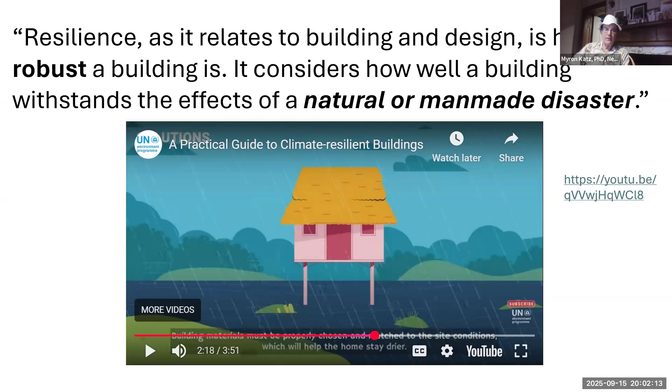Since they're in the wholesale business, they're interested in getting electricity to people. So from the point of view of energy, they say reliability is the ability to meet the electricity needs of end-use customers, even when unexpected equipment failures or other conditions reduce the available power supply. I find this particular definition confusing because it seems to mix the 2 meanings of reliability and resilience together. Until you get to the comma, you're talking about reliability, and after the comma, you're talking about resilience. So as a way of explaining reliability and resilience, they confuse you. But apparently that's not uncommon for utilities.

And so we'll see how you get resilience despite the fact that the utility is not helping you. But part of the problem is that the way they do things, they consider utility reliability from the point of view of the supplier and not from the point of view of the consumer.

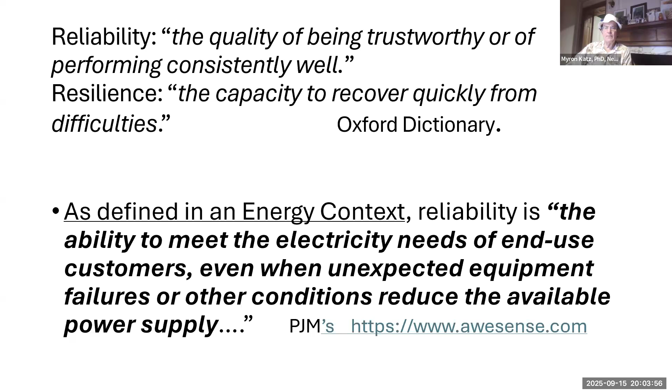And we're going to be showing how that changes how to solve the problem in a bad way. Okay, so I get this out of here. I don't know, there's something from Zoom getting in the way of doing the slideshow, so I'll forget about that.

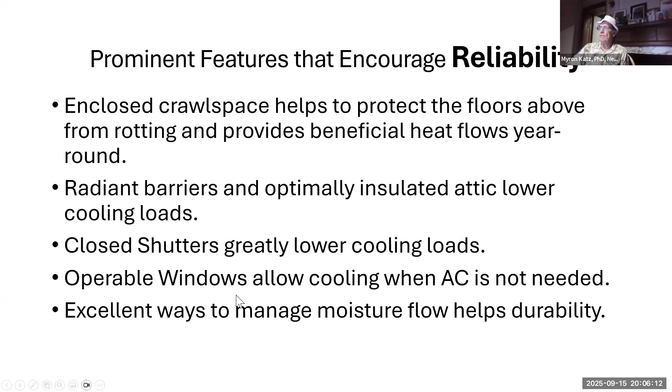Radiant barriers slow down the heat gain in the attic. Closed shutters lower cooling bills. Operable windows allow cooling when AC is not needed, and they provide excellent ways to manage moisture flows, helping durability.

Two more reliability features: multiple ventilation methods also improve indoor air quality, and efficient lighting, cooling, and water heating lower carbon footprint. But the last one on the list is both reliability and resilience, namely Wi-Fi controllable water heating and cooling systems provide load flexibility.

And if you don't know what that is, raise your hand, ask me up, disturb me, and I'll explain it. Savings or income when time-dependent electricity pricing is implemented, and we can use that money to buy batteries that we may not have purchased at first.

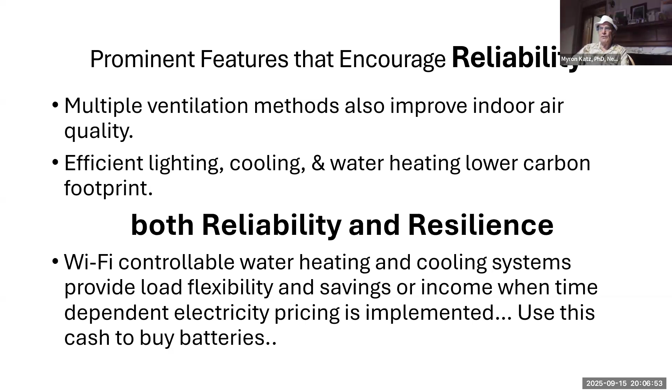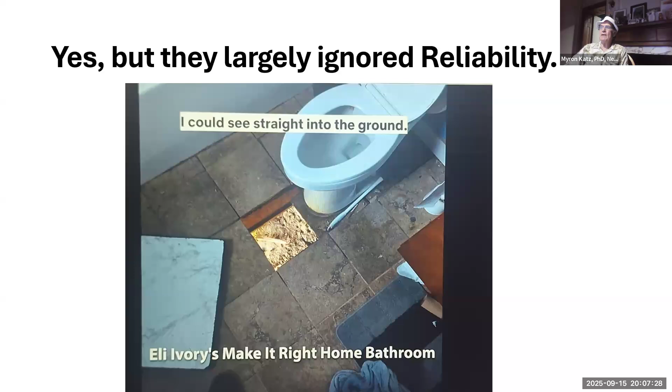He says, you mean your leg went through the floor? Yes, my leg went through the floor. And there it is, the hole in the floor right in front of his toilet that rotted out, the wood rotted out. So yes, they built a resilient home, but they skipped lots of things about reliability.

So you might think you get reliability if you do resilient, but not necessarily. The Make It Right project leaders mistakenly believed that resilient measures would ensure reliability, leading to a critical design flaw in home construction. What did they forget to do?

They didn't realize that flood protection does not stop persistent wood rot from constant wetting, especially with prolonged indoor cooling below the outdoor dew point. I think most of the people in this group know what those words mean, but if you need to interrupt me, please interrupt me.

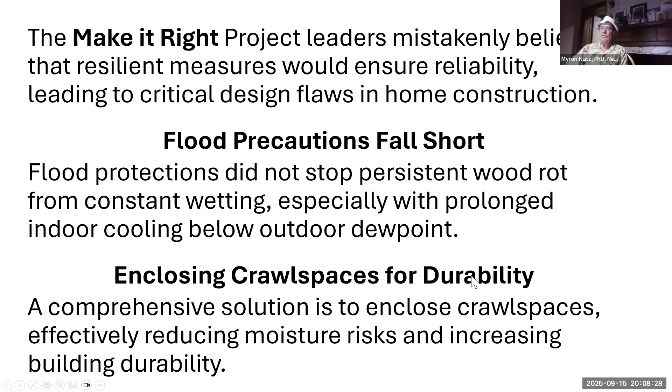So if you enclose the crawl space, you improve your durability because there is a comprehensive way to protect the floors from that moisture flow. And while you're doing it, you'll have beneficial heat flows. If you don't know why that is, I encourage you to ask me.

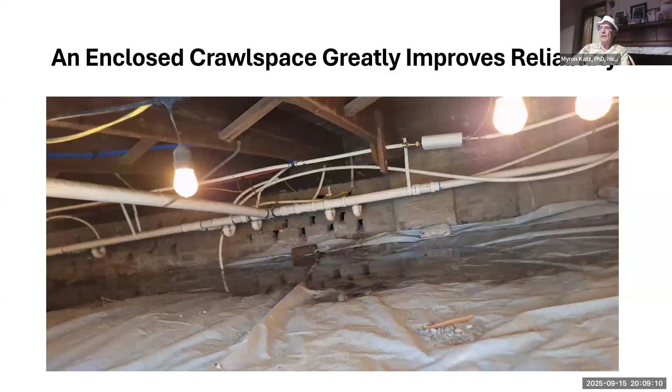So I opened the crawl space literally two weeks ago. It was the first time I did it in over half a year. Much to my dismay, there was standing water of around 10 to 15 square feet all over the plastic cover over the floor.

And I said, oh my gosh, maybe this crawl space is failing. But when I checked out the wood, it was all dry. And when I checked the temperature of the air and the humidity, I found out it was dry. The crawl space had a dew point of 60 degrees Fahrenheit.

I have this little app on my phone which allows me to do a test like this no matter where I am. I ran the app for about three or four minutes and saw the reading meandering, then start to settle down around the current temperature and relative humidity. If you do the calculation, those two numbers give you all you need to know about dew point.

Maybe you don't know what dew point means. A simple example: take a bottle of water, pour all the water out, close the top, put it in the freezer, and you'll see water accumulates in the bottle and refreezes. That means there was water in the air. The water comes out when the temperature drops, and when it first starts to drop out, that's the dew point of the air.

So if the air below the house is colder than the air in the house, the moisture will be deposited on the floor and can rot it if the floor is made of the wrong materials. Old houses have pine or cypress floors, very thick, which could tolerate a lot of moisture flow. But when this house was new in 1880, there was no air conditioning, so there was no driving moisture flow. Modern homes have air conditioning, so you've got to take care of the moisture flow, and they didn't do that and make it right.

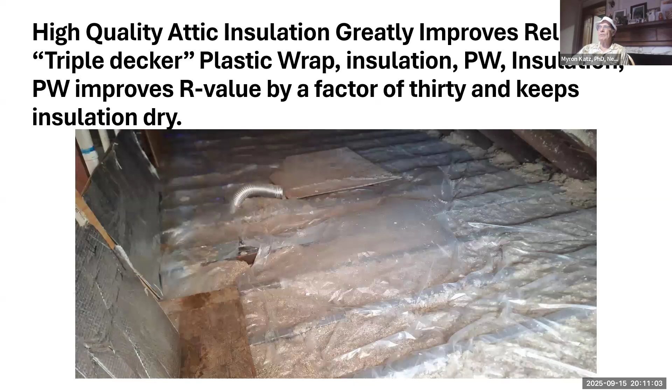Okay, so what else did we do in this house? Well, I used super effective insulation. This is the floor of the attic when I walked in, literally on Sunday, to take these pictures for the slideshow. You can see there's insulation on the floor of the attic. This happened to be blown-in cellulose with plastic covering it.

I wanted to show you what I described, I told the workers to do this. I said put a layer of plastic down, then insulation, then plastic, then insulation, then plastic. That's how I wanted the layers installed. I already had a study published on my website, which I'll show you a link to, where this improves the R-value insulation by a factor of 30.

So the next picture shows you the insulation. I pulled away some of the plastic, then pulled away about 10 square inches of cellulose off the floor down to the second layer of plastic. You can see there's a second layer of plastic here under the first layer, and insulation below that. So this is a triple decker, as I promised. That's exactly what's in this attic, and that's why the insulation works so well.

So the next thing I talk about is the attic itself. How well is it keeping cool? First of all, it's cool because it's got a white roof. Secondly, it's cool because there's a radiant barrier below the rafters. Those two together - I did a temperature test literally yesterday. At 1 p.m. I measured the temperature in the attic.

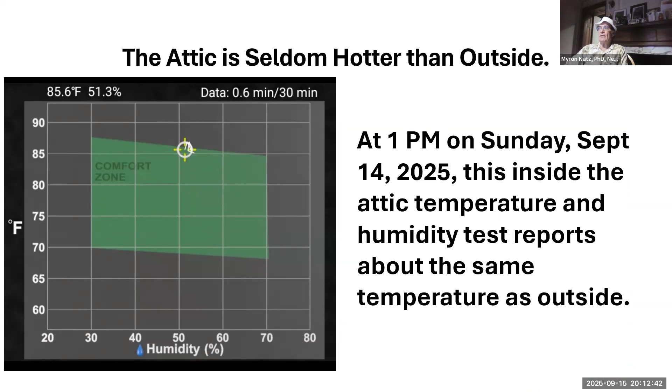It was about 86 degrees, which is about the same temperature it was outside at that time, which means the attic is seldom getting hotter than outside, which is what I assert in the title of this paper.

Now I'm talking about the windows. The windows are very important. As I mentioned, in resilience, closing the shutters and closing the windows are very important. But it's also important to be able to operate them.

I took all these pictures while holding the cell phone in one hand and opening the windows with the other. So you open the windows, a simple double hung window. Double hung windows are good, they work very, very well. They're not worth replacing if you can get them to work properly, the way they were originally designed.

What I did is I added a screen between the outer stop of the window sashes and the inner stop of the shutter, which most people have never seen before. I'm not surprised, because I invented it. And I'll show you that the screen is operable.

So if you open the window, you get to the bottom of the screen, you can see a flap here. If you raise the flap, that's what I mean by operable, and you put it up against the stop on the left so you have access under the screen. Stick your hand through here and open up the two shutter latches and push the shutters out, and you've got the windows open, the shutters stay open.

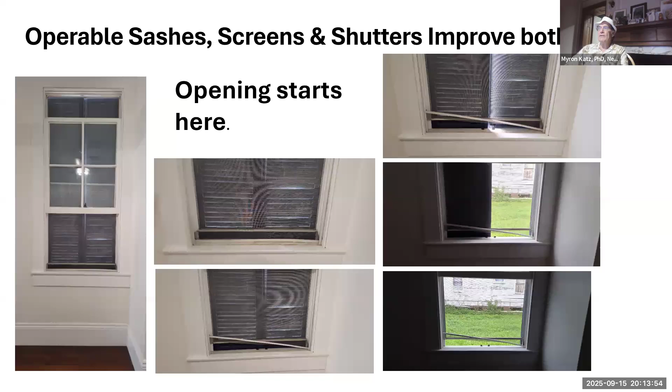They stay open because the way shutters operate is they stay open. This latch right here keeps them stationary when they're down. But if you want to close them, you stick your hand in.

I was holding the camera with my right hand, so you can see my left hand operating the shutters. I'm operating the left shutter in this picture, and I pull it, it's almost closed. In the second picture I start operating the shutter on the right, and in the third picture now both shutters are closed. I close the shutter latches, lower the flap of the screen, and close the window.

Now I've got complete access to the shutters from the inside. It's a big deal, because if you live in a home where a hurricane's coming, you need to be able to operate the shutters without getting on a ladder.

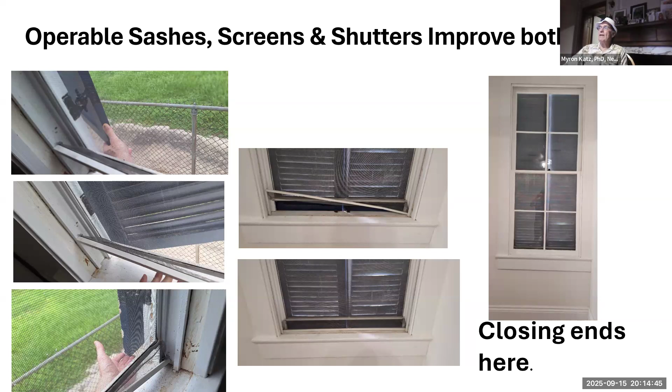It's dangerous. This also provides security against people who might be criminals. You can leave the windows open with the shutters closed and no one can tell the windows are open, so you have the opportunity for ventilation even if you live in a neighborhood that's not too safe.

You can also force exfiltration, namely ventilation, where you're taking air from outside and passing it through your house and exhausting it, and you can do that to protect the walls of your bathroom. So how do you do that?

like maybe the next two or three months, and similarly in the spring, you can turn on this exhaust fan, using the bathroom exhaust device to take air out of the house, and through the adjacent window of your bedroom bring cool, fresh air into your house and exhaust it out the bathroom, doing this continuously for months if you want to in those off-season non-cooling periods.

But when it is cooling time or heating time, you want to ventilate very little air because that's conditioned air. So you might run it for 5 minutes if you use the toilet, or 15 to 20 minutes if you use the shower.

And you really need to do it, because this house was damaged by the previous tenant who didn't use that fan and overwetted the inside of the bathroom.

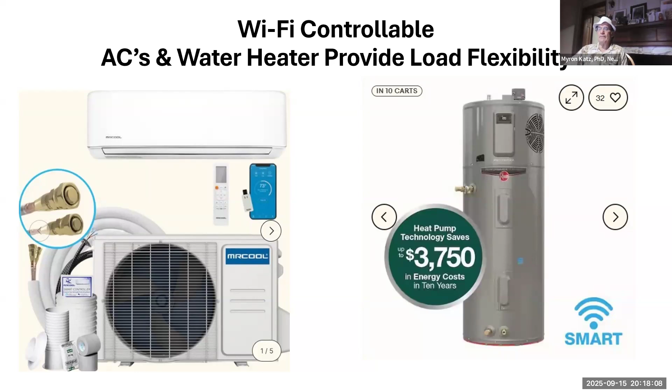So now I want to get to the part about the grid. As I explained, we're going to solve the problem of the grid by doing something in your home. How do we do that? Well, if we go back to the third slide where PJM talked about reliability and resilience,

they were interested in providing resilience despite the fact that the transmission lines might go down or the generators might go down, and they call that resilience and reliability in a mixed up way. But nevertheless, that was dependent upon the assertion that the grid was all a top-down view, namely the electricity comes from the central generators and central transmission lines through the distribution system to the grid edge where you and I live.

This is a quote from an email from one of the members of the Electricity Brain Trust from September 9th: many African villages are entirely skipping the grid phase of electrification by moving directly to solar battery systems which don't rely on expensive and vulnerable transmission lines.

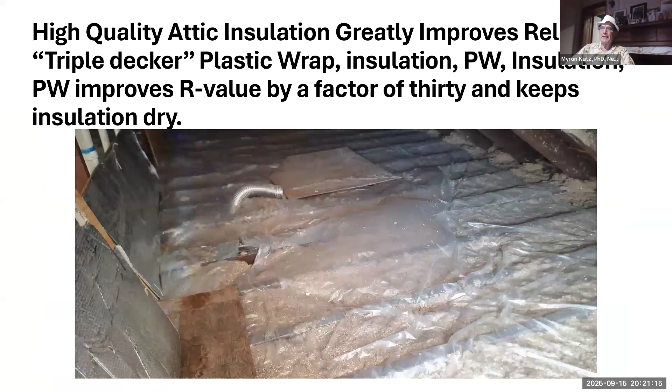Get back to the slideshow over here, and then go to the last slide. Got to be careful not to get past the last slide, which is what I just accidentally did.

Looking at my speaker's notes, it says that if ProRate was successful as expected, it can be promoted, scaled, and exported to all utilities of the world, and thereby have a big impact on slowing the causes of climate change. So this ProRate would have these big effects all over the world if it was tested successfully here. So it's not a surprise that promoting ProRate is a regular activity of these meetings.

Okay, now I am finished talking, and I hope people ask questions because I don't know how fast I did that. I probably did it way faster than I needed to. Looks like I did it in 20 minutes, and I want people to ask questions. So somebody want to talk, please do.

Where'd the water come from under the house? Okay, so let me go back to that slide and I'll explain it to you.

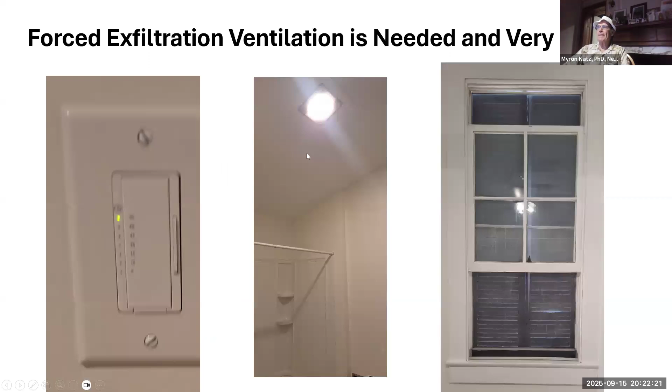And so this one is not. I could get them all to go into traps, and I was ambivalent about whether I should put them in traps or not. And I'm sort of glad I didn't. But that's where the water's coming from. It's coming from the condensate.

Why are you glad you didn't? Because I showed it wasn't needed. Namely, I showed that even if I didn't put them into the traps, the crawl space could handle the moisture load, and it did. So I was glad I didn't.

I also wish I had. I mean, it would have been drier. But nevertheless, you're glad you didn't because it was an experiment? Yeah, because it's certainly not best practice. I agree, but here's the thing. I actually tried putting condensate lines into traps in other homes, and I found that it also caused another kind of problem where the condensate line didn't drain enough and it clogged up, and then the air conditioner had problems.

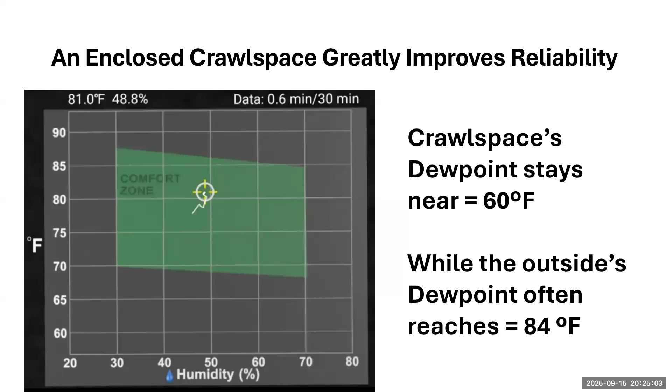I'm glad you were paying attention. Okay, so any time you say enclosing a crawl space, I think you should add the word properly before that, because otherwise it sounds like you're saying as a matter of fact that if you enclose your crawl space, you're doing something good. But a lot of times you can enclose it and cause all kinds of mayhem and problems. I agree. I absolutely agree with that.

In fact, I had some trepidation when I opened that door to get in there. I didn't know what I was going to see. Actually, I've spoken to many people who thought they knew better, installation contractors, and they said you can get a big mold problem if you make it too tight, etc. I didn't make it too tight. I have other pictures, not in this group, where you can look at the side and see tiny cracks around the door openings. So it wasn't too tight.

The air conditioner itself is constantly drying the crawl space, because the wood floor that separates the ceiling of the crawl space from the floor of the house is constantly being dried by the air conditioner. Especially when you've got a puddle under there - I'm sure more moisture came through than came out from the puddle. But you're right, it'd be better, Myron.

I've got a question. How do you avoid mold? Well, you're not going to get mold if the dew point's low, period. I didn't have any mold because the dew point is low - see, it's 60 degrees, which is easily 10 to 15 degrees lower than the temperature of the air conditioned floor.

Some people cool at 75 degrees, some cool at 70 degrees. I'm not telling you what they have to do, I'm just saying it's drier than that, and you're not going to get any mold growth if the air is dry. More importantly, it's not just that the air is dry, but there's no moisture accumulating in the wood - it's not accumulating, it's passing through. One of the things people don't realize is that you do want moisture to flow through a house. You don't want it accumulating.

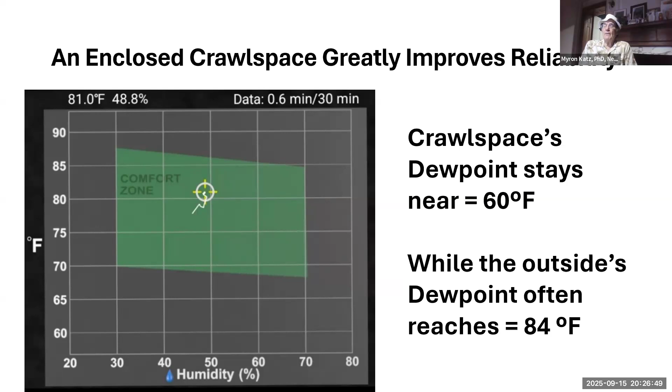That was an interesting question, I skipped over this, but it's important to talk about. Let's go to the attic insulation - next picture. The guy who discovered this experiment was a high school student, there's a long story about it.

He realized that when he first did the insulation without any plastic coating, he got a much lower R value than the insulation's rated value when he bought it at the store. So he decided, let's put a cover on it, and sure enough the R value increased by a factor of 30 - not to 30, which is the actual rating of the insulation, but 30 times higher than what he got on his first test. So then he decided, well, maybe this is trapping moisture in the plastic. He did a subsequent test and found the insulation was drier with the plastic over it than without it. We can argue all day long why that is, and we could be right or wrong about our arguments, but this is what the tests show.

This idea that membranes improve insulation efficiency is actually published on the ACEEE website - they published exactly the same report. So it's a respected report, and I use it, and this is all bone dry material.

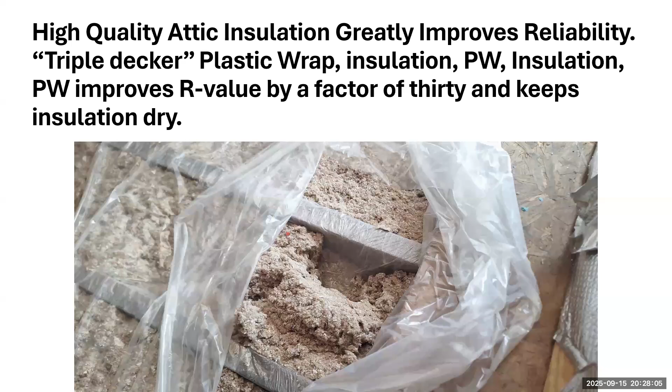Myron, is blown-in cellulose sort of your go-to insulation option for this condition? You can use blown-in cellulose, or blown-in fiberglass, or fiberglass batts. One problem with fiberglass batts is the spacing between the joists may not be consistent or match the fiberglass batt width, which makes it tougher to do, and you need to keep labor costs down. Nothing is faster than blowing in insulation in terms of labor costs.

You can do any of those three. The particular report I refer to - if you look on my website, Building Science Innovators, I might be able to put this on the screen. If we go to chat, maybe I can bring this in with a chat button. Anybody know how to go into chat? Let's see, where are we - I need to get to where I was.

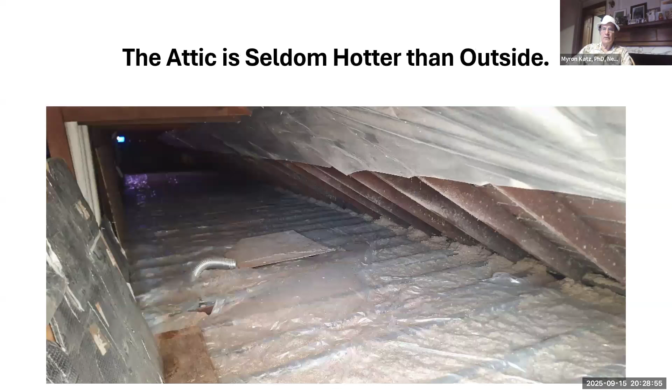You might mention that some manufacturers do sell encapsulated insulation - they really encapsulate it so the installer doesn't get itchy hands, but it's done properly. It's 1 mil on the outside, the inner layer is 0.5 mil, and if you put a second layer next to it of 0.5 mil, you end up with 1 mil, 1 mil, and 1 mil sandwiching the insulation.

I just put the link to what we're talking about in the chat, so you can pull it up there. There's actually a published report - I got a copy of it and transcribed it because it was published in printed form, not an email, since this was 1986. But I transcribed it, and if you look up that same name you'll find it published on the ACEEE website. So it's respected technology, but certainly unusual - most people don't know about it. And if I'm not showing you something unusual, then I'm not satisfying my own need to be helpful.

All right, so good. Please ask me some more questions - I'm delighted.

Did you hear me, Myron, earlier? Yeah, I heard what you said, Dave, and I really appreciate it. Okay, no, I wasn't sure that my thing was working.

I want to talk a little bit about why this phenomenon happens. Why is it that insulation is all on the floor of the attic, according to the manufacturer's recommendations? And according to the manufacturer's specification, this insulation should be working 30 times better than it does when it's installed on the floor of the attic.

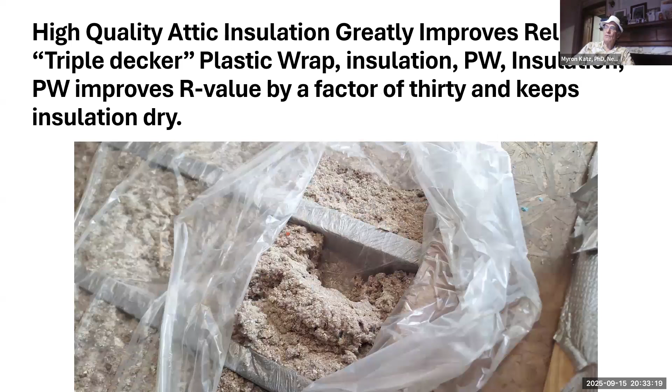But when you get to the end of the talk, I'm trying to get to answer all the questions about utility resilience, home and the city's resilience, and climate change, in this part of the talk.

First of all, we want to put in microgrids, and everyone's in favor of microgrids. I don't care where you are, except for the utilities. Everyone likes microgrids. The utility likes microgrids that they own. They don't care for microgrids owned by the customers. But otherwise, everyone likes microgrids. The question is, how does this solve the problem?

Well, you would think, well, you don't need the power lines. By the way, it's funny, in the background there are pictures of power lines. But anyway, so maybe the power lines are coming from this microgrid servicing nearby homes, I don't know how that works.

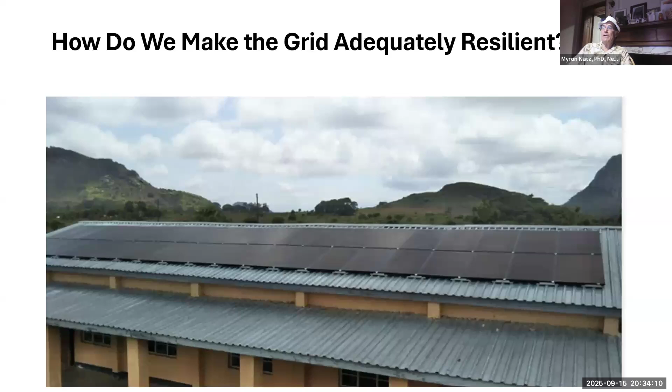The fact is, if we had at the grid edge most homes on microgrid, that would solve the reliability and resilience problem of the homes, and probably also for the neighbors, and lower the cost of electricity and make it more reliable. But because we're not in that condition, we're not where Malawi is now, we have this whole grid system set up. We have transmission lines and distribution lines and generators already set up, and utilities already here.

Okay, now if nobody wants to ask questions, I'm happy to stop the slideshow and we can have a general conversation between us, because I think maybe we don't know each other as well as we might. So I'm going to... I do have one more question, Myron.

Going back to the Make It Right houses, I'm curious about some of the specific material choices and details that might have caused those failures and reliability issues that you shared.

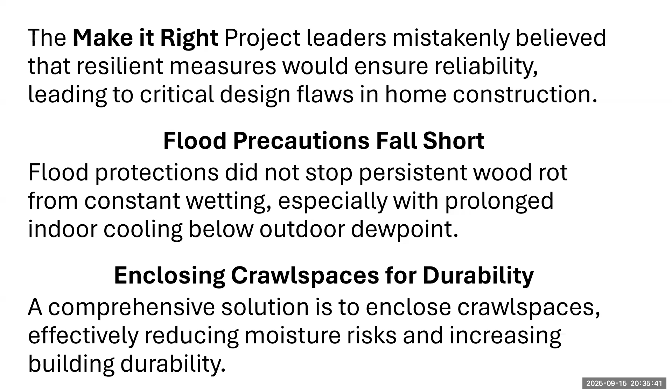Well, it turns out if you watch the video—not mine, obviously this isn't a video, but if you watch the video at about two-thirds of the way through that 10-minute segment—they say they used a special wood which has no chemicals in it, blah blah blah. I don't know what it was, but the bottom line is if it's not made out of something like cypress or longleaf pine or some material that can handle moisture flows, it's not going to handle it. It's going to rot.

And the other problem with floors is that the U.S. flooring industry—that's not their real name, but I'll call it that generically—has a problem with warped floors. So what they tell people to do is put a plastic layer over the subfloor so that the floor you can see doesn't see the moisture flow coming from the crawl space. That's a specification, almost a requirement—if you don't do it, you won't get a warranty from the flooring company. The trouble is that traps the moisture flow. So on any home I work on, I say get rid of that. You do not want a plastic layer between the subfloor and the top floor. You don't want to trap moisture in the subfloor. That could very well have been what caused the floor to fail, but I don't know—I wasn't there when they built the house.

Thank you. Did you reference the Musicians Village study that LSU Ag did? No, I didn't—when their floors buckled? Tell us about it. Well, again, also after Katrina, Habitat for Humanity built the Musicians Village. It was, I don't know, maybe a dozen homes, maybe more. 25, actually. Awesome.